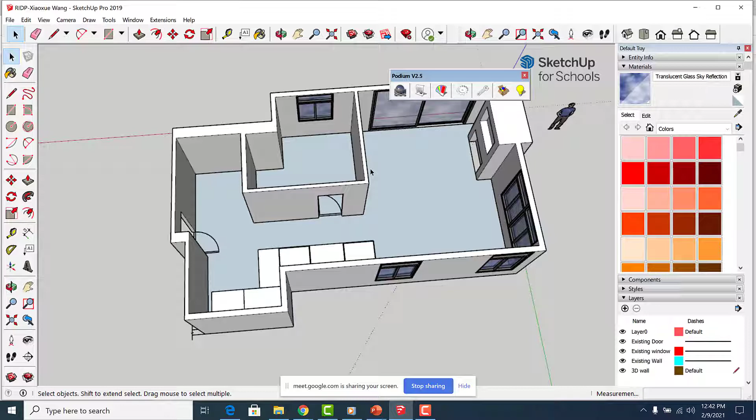If you do everything step by step the way that I asked you guys, probably you can do the baseboard really simple. I asked you guys to make a block of your walls, make a block of your floor. So what you have to do, you can copy your floor and bring it out.

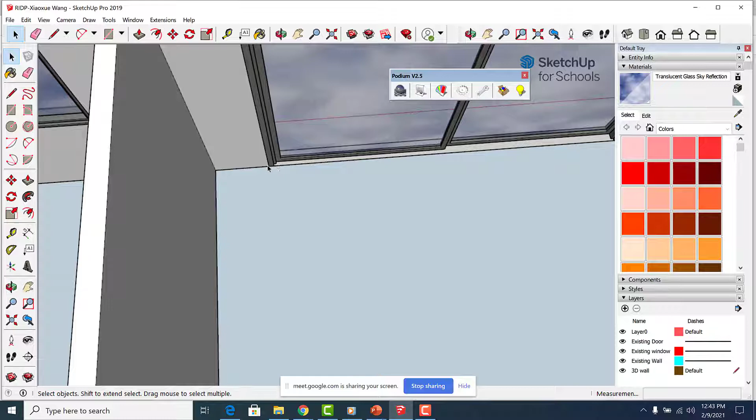Sometimes when we are making the floor, the part that's opening would already be reflected there. Last time I added a line, then I realized it's already there, so I just wanted to double check. See, it seems that the opening is there.

I don't know if you remember last time that I explained how to add the baseboard, because baseboard, we stop it where we have our opening. So the baseboard is not continuous there.

So why is it too slow? No. Nothing is happening. What happened in the morning? I know, oh...

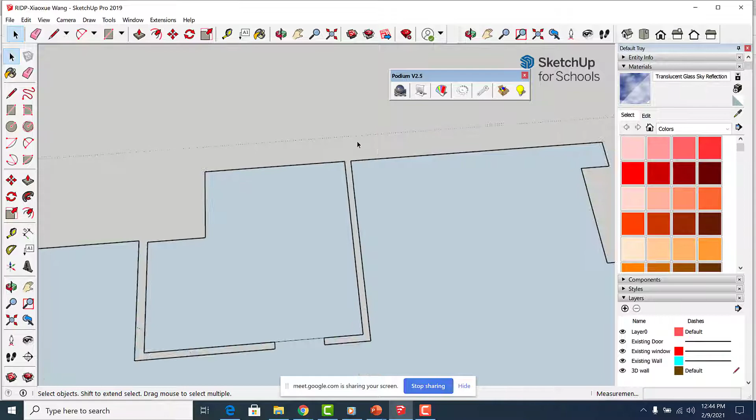Okay, here you go. Remember I asked you guys to add a line where you have your opening. In this case, it seems that I have the opening. So what I would do, let me just explode this to really see what's happening.

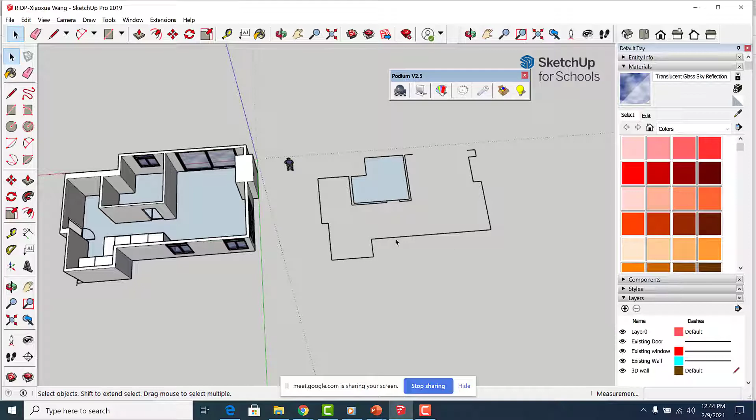See here, this is the opening there. Then we have no opening here. We have another opening there. Let me see - so basically I don't need to mark my openings.

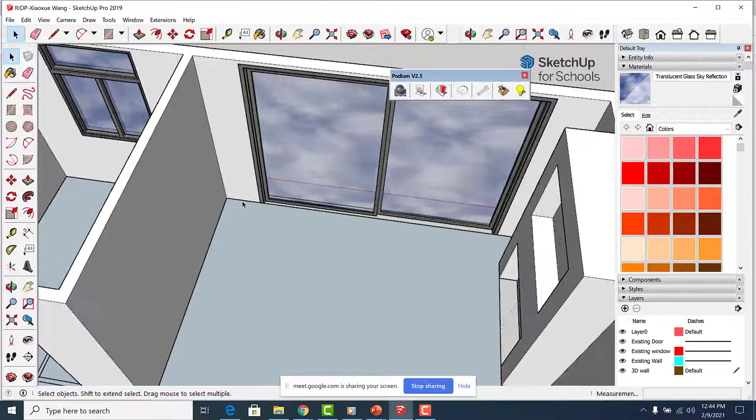The only thing is, if you already have the frame, sometimes you have a molding around. If that's the case, maybe you can mark the start of the molding, because if I have a molding here, imagine it goes all the way - my baseboard would stop here. So in that case, I would mark the opening, or I can modify it later. Either way, it would be fine.

So for now, I don't have the molding, so I would just ignore it. Imagine that we don't have any molding and I have my openings - that's perfect. In this case, the other thing you have to keep in mind really depends on your design.

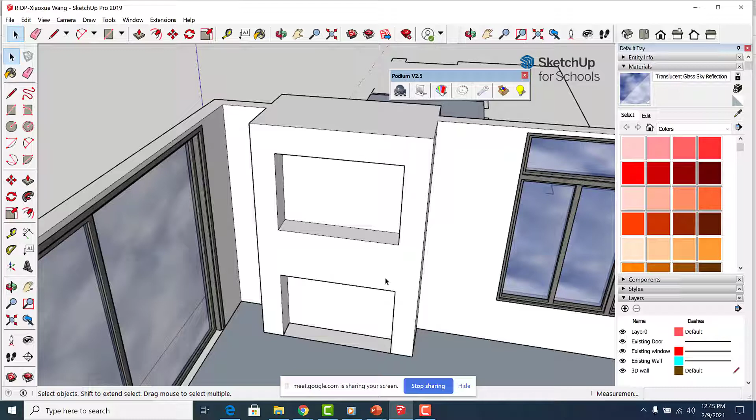Sometimes the fireplace - it's the electrical one - it's not going to the floor, and then your baseboard continues here. Sometimes it's a recessed electrical base, not electrical, it's an actual fireplace. And even sometimes you have a little bit of stone or brick that's coming like that, so then probably I don't want to continue my baseboard here.

So it really depends on your design. I cannot give you one way to do it. You have to know your design and decide how to do it.

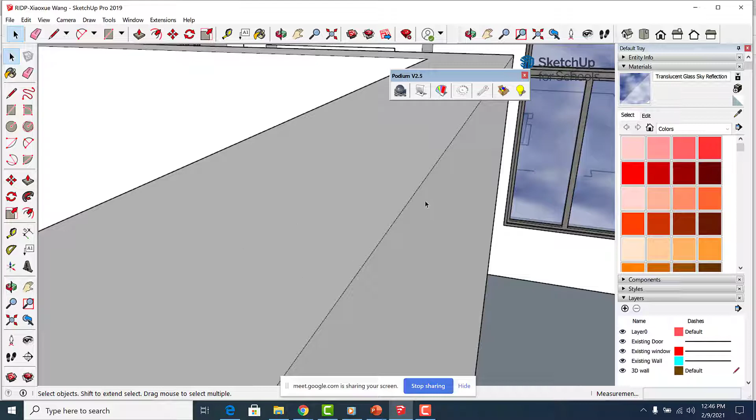Something that is bothering me is that I get stuck inside one part and have to zoom out every time. My suggestion is always at the beginning of your design, add a scene, go to the top view so you see everything, add a scene, and change the name to top view. So anytime I'm stuck again, I just click here and I'd be fine.

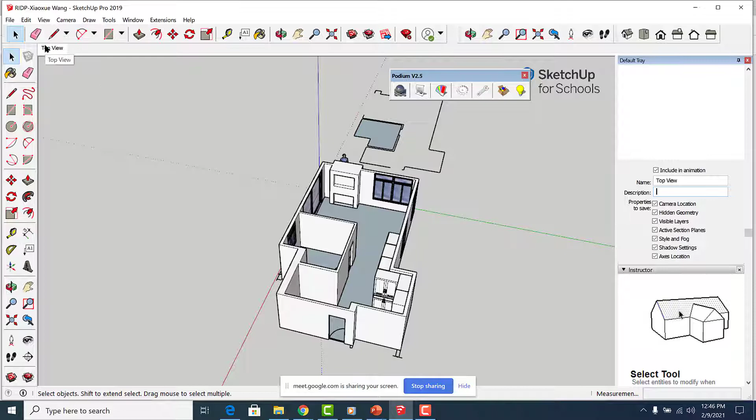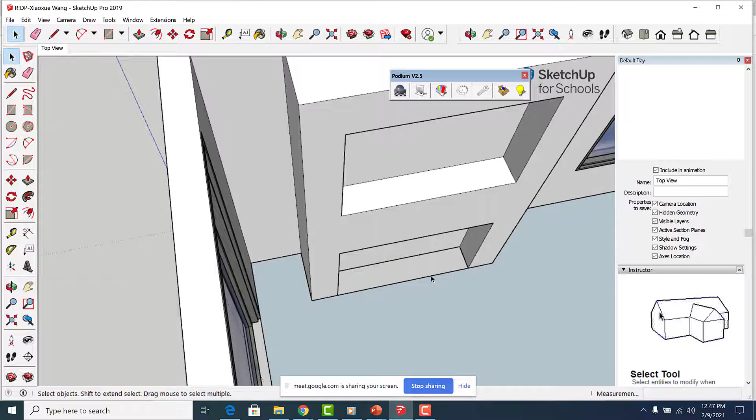In that case, I would maybe just assume that my baseboard stops here. Let me see if I have that opening too or not. Yeah, so maybe I stop my baseboard here, because for sure I don't have baseboard there. I don't have your design, so you have to decide.

For now I would put, for example, brick there and make it clear that part is brick. What's the finish of your fireplace? Could it be a stone, a marble? Stone? So it goes all the way to the floor?

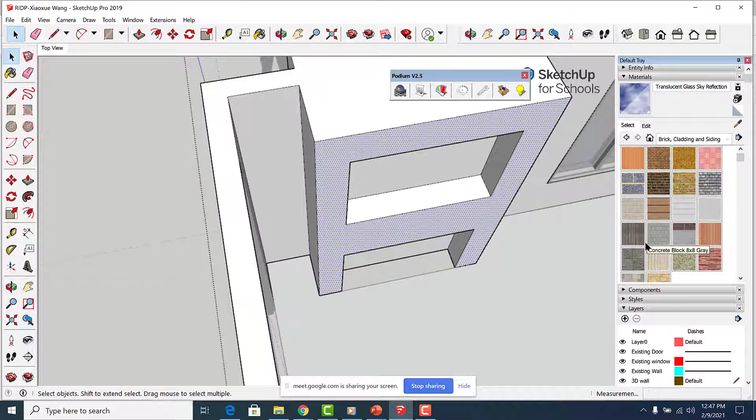No, it should be like where the partition is right now - there is like a partition. So above that, it should be stone and the rest... the rest is what? Are you sure? Up and the rest above.

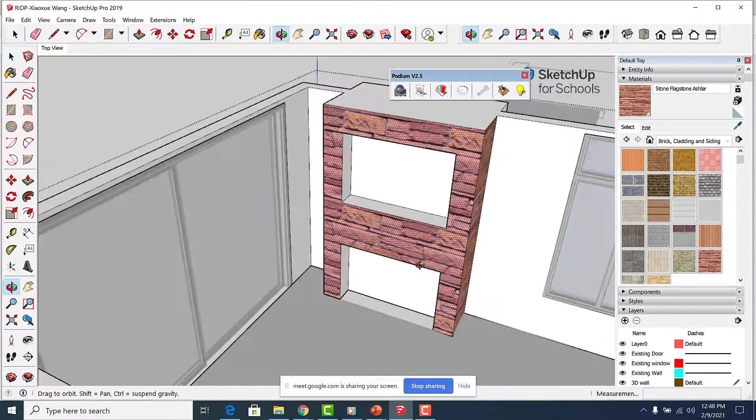Depends on what your design is. For example, in mine, from that partition up, it's like painting, and the molding is wood. The rest bottom part is stone - probably ceramic or a stone.

Yes. So in this case, as I mentioned, I would imagine that I don't need the baseboard in front of the brick. You can, but we don't need it. To remind you guys, baseboard is to help protect the bottom of your wall. I guess my mouse is dead now.

See, as I mentioned, if I record - can I ask a question? Sorry? Can I ask a question? Yes, go. Now, which one is better: to put the brick over the fireplace and then make a hole, or vice versa?

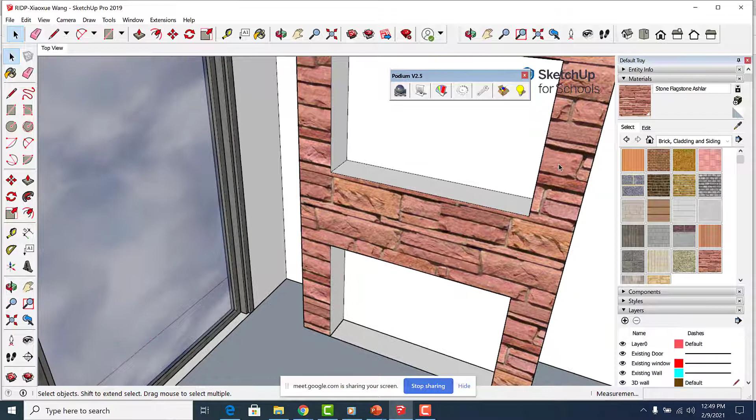Is it better to put the brick over the fireplace before you make the hole? Doesn't matter. Anywhere, you do it this way, then add the material, or it doesn't. See, if I have the brick, I can just make a hole after. It doesn't matter.

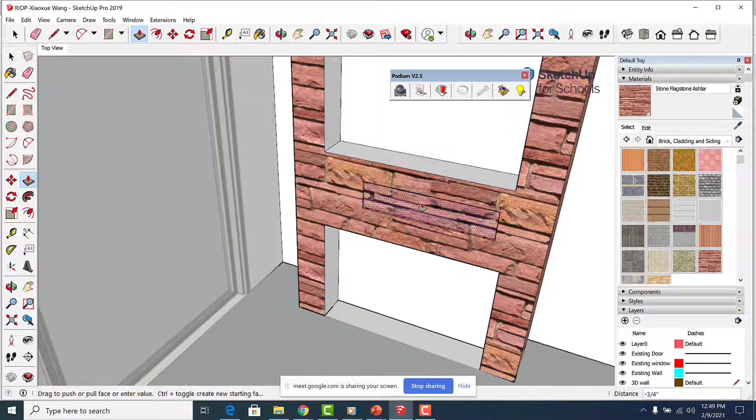The only thing is, when you have the material and then apply the hole, this material goes all the way with your hole. But if you apply the material later, you can apply it anywhere that you want. Here it's not a big deal. If you don't want that, you go change the material, or I can go change something else there.

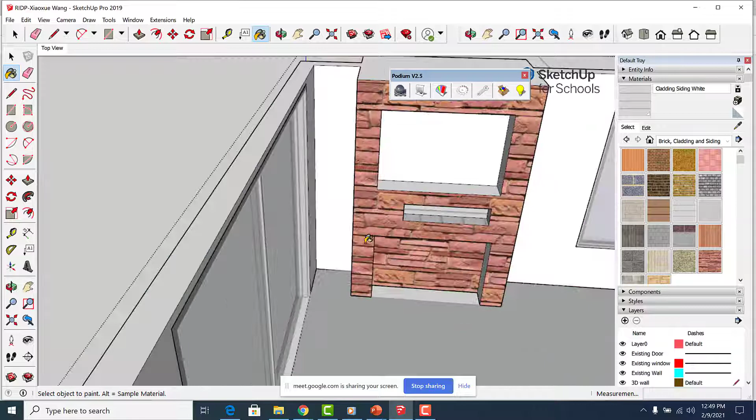Okay, so honestly it doesn't matter. It really depends how you are doing your drawing. So in this case I had the fireplace and I applied the material later. If you don't have the fireplace, you can just do it for now.

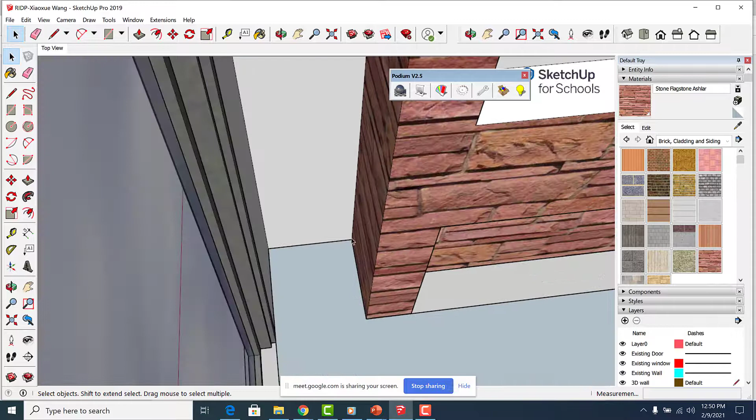Imagine this is my fireplace, and my point is I don't need baseboard here. If you want to put it, it's fine, then you have to fix it here. For example, if I want the baseboard to go all the way, I keep this line. If I don't want the baseboard there, I delete this part. This is the path for my baseboard, keep in mind.

So anywhere that I want the baseboard, I keep it. Anywhere that I don't need it, I just delete it. In this case, I delete it.

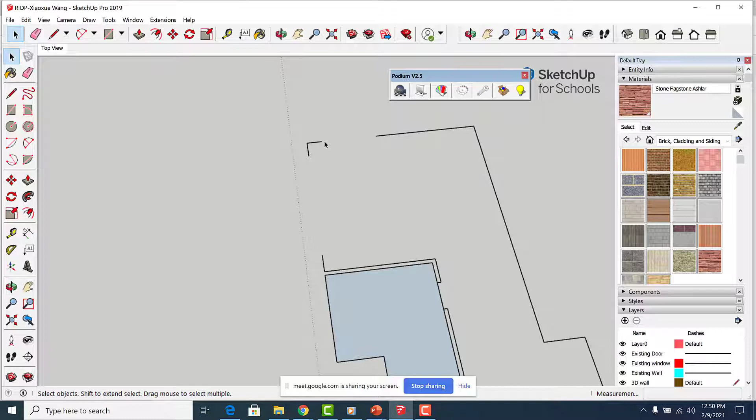So then the next thing, when I have the path, the question is: what's the profile of your baseboard? There are many different types of baseboard, really fancy, 10-inch, 8-inch with lots of detail. It could be just a 4-inch by 1/4-inch rectangle, and that's it.

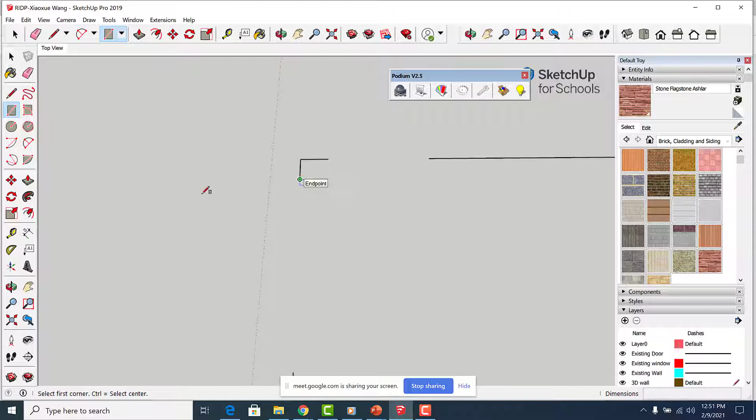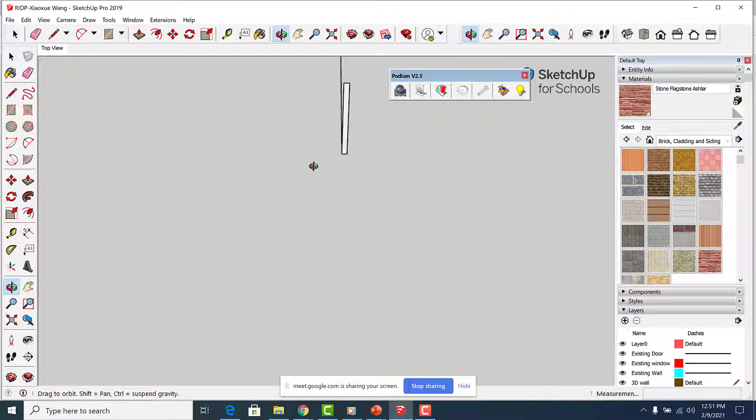That's part of your design. I cannot decide for you guys, but for now I would just draw something. I want to draw a rectangle that the red axis passes through. I right click with the right arrow, and I just draw, for example, 0.25 comma 4-inch.

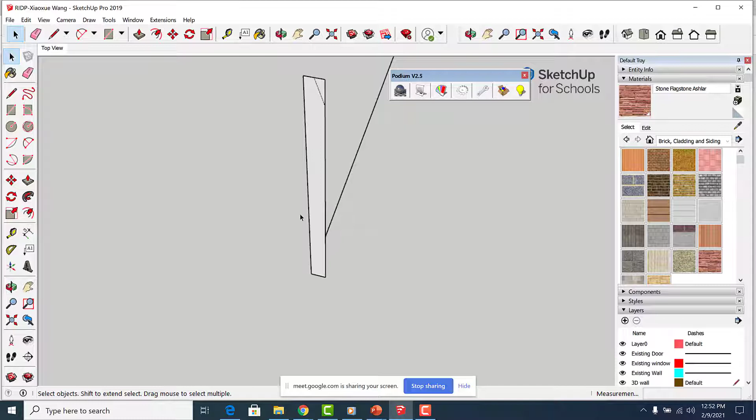It could be, if you have a really modern design, something like that. If you want to add detail, be my guest. Even you can go in the 3D Warehouse and click search for molding baseboard, you'll see tons of them. You can import it into SketchUp, copy the one that you like, bring it here and use it as your profile.

For now I would just do something to show you guys how you can do it. Imagine, again, I would do it kind of modern looking. So it could be something like that. It's simple and clean.

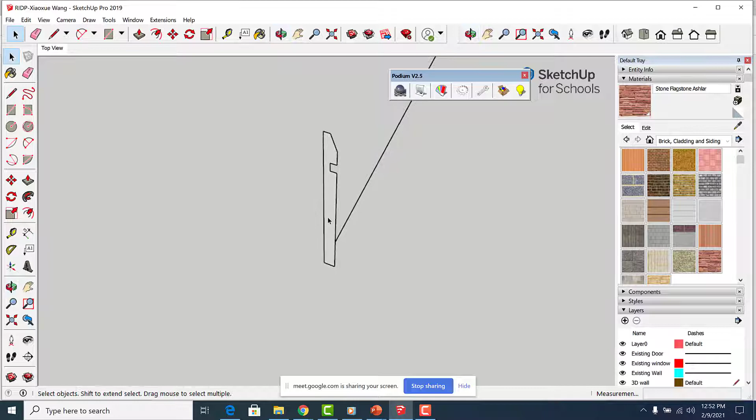When I have the path, what I would do is make a copy. I select and I Control C because I need it again. If you're not sure if you can keep it, just make a copy, place it somewhere. It's not a big deal. Anytime you can come and select this one.

Now I have the path, I have the profile. What I would do is double click. In this case, it's two lines, I can select it like that. But when I have a path like that, the easiest way is triple click.

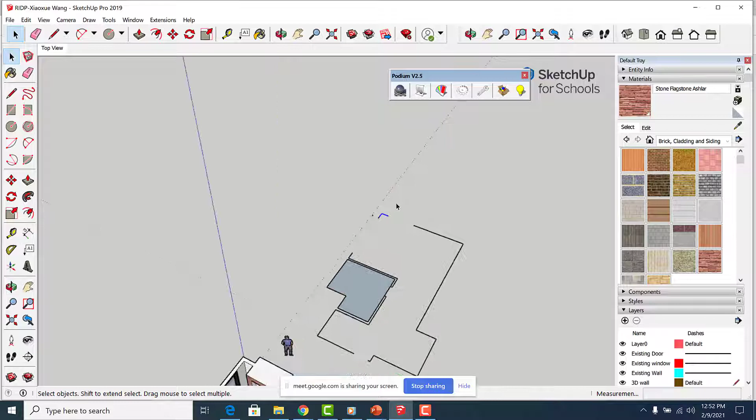If I triple click here, everything that is connected with that would get selected. Is this my path? No. So what I have to do is remove this from my selection. How can I remove anything from the selection? You press shift and open a window like that.

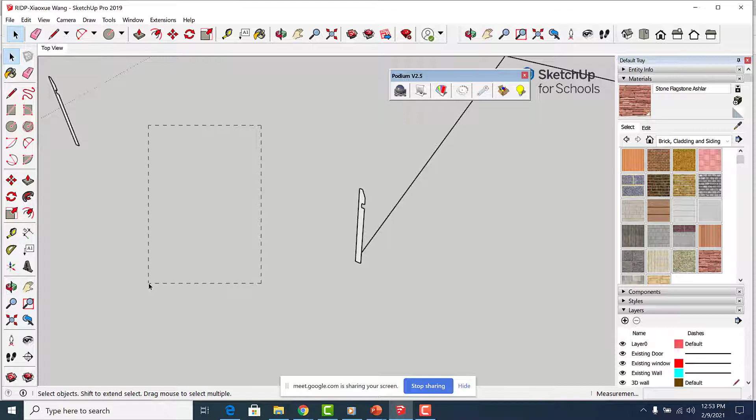If you open a crossing, it would remove that line too. Remember, this type of selection selects everything that is completely inside it. This one, crossing, when you see the dotted line, means anything partially in it would be selected. If I triple click to select this one and press shift and do this one, now this line is not part of my selection anymore.

I hope you guys remember those exercises that we did for selection. In this case, I triple click to select them, press shift, and remove this. This is my path, this is my section.

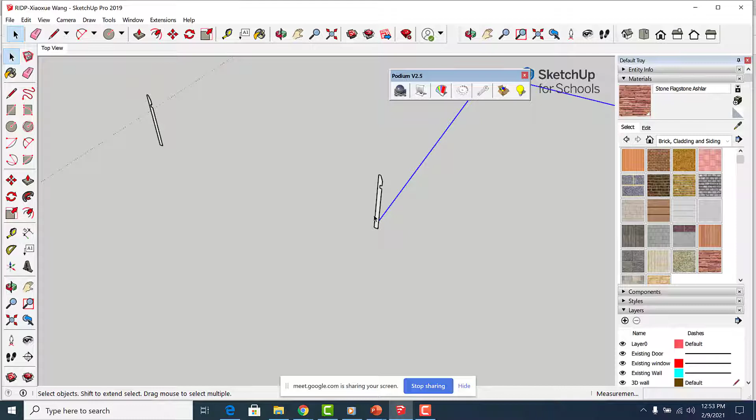This is my profile. I go to the Follow Me tool and tell SketchUp to just use the path and draw this. When I'm done, please guys get into this habit: this is one piece, I would make a group. If you don't make a group, you would forget it and it would cause you problems later. So, triple click, make a group.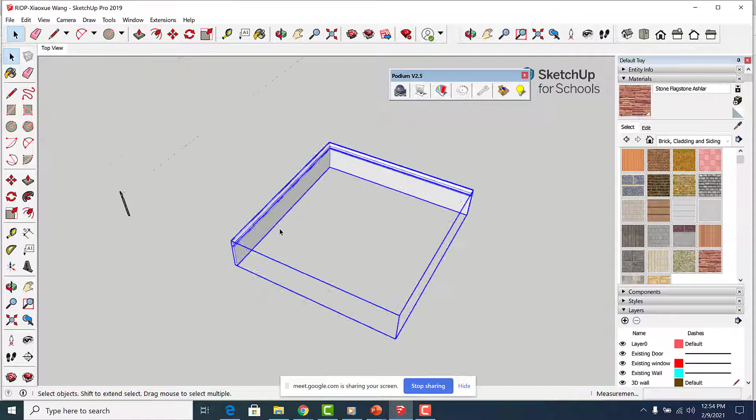If you know the material, apply it right now. If you don't know the material, leave it for later. So the thing is, if you're not sure about the material, it's better to apply it later, because when there's no original material applied, you can apply it outside of the group.

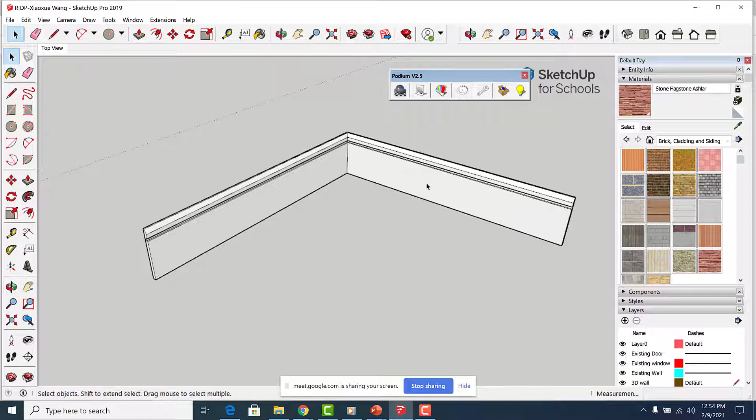But sometimes if you apply the material, the next time you want to apply another material, you have to go inside the group. So it's up to you, but for now I would leave it like that.

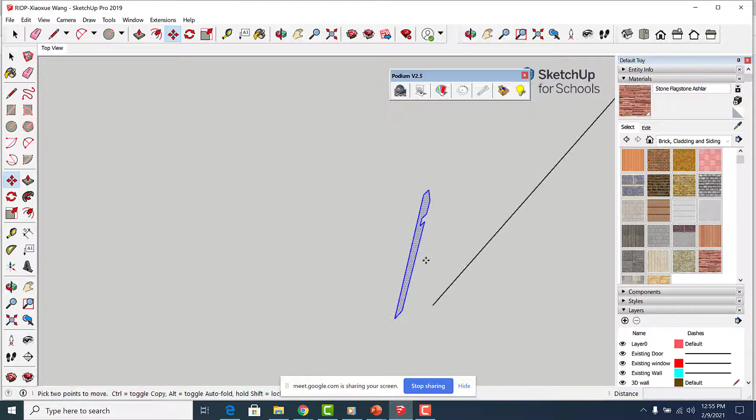Now I go to add the baseboard here. So what I would do is use Control V. Remember, I saved this one and I place it here for now. As you can see, it's in the wrong direction, so I have to rotate it. Around which axis should I rotate this?

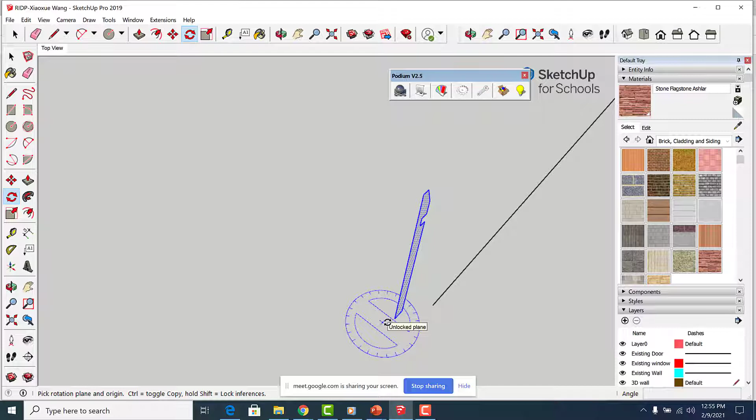Green one? Are you sure? Red. No. Like that. See, it's blue. Yeah, green, red. It's not. Then it's blue. But it's gonna be trespassing. The green axis is gonna trespass. See, I want to rotate this like that.

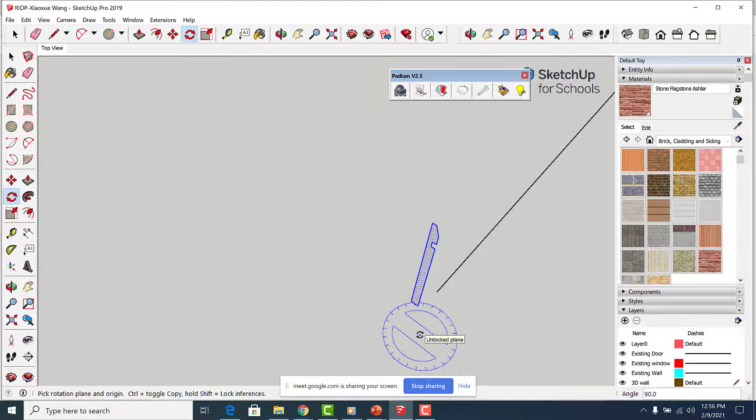It's around the blue axis. That's why when the circle is blue, I place it there. Then make sure you go to the green direction, for example. When you see the red direction, you click. But Kirash, it is like this. This is the green and this is the red. The blue is going up. It's already up, right? Yeah, but okay,

rotation works with the axis that is passing through it. See the blue axis passing through this, that's why the circle is blue. So I'm rotating this around the blue axis. I know that you said it's not clear for you. So what I would do, I would remove this one and put it where I have my blue axis.

Okay, so now tell me, around which axis am I rotating this? Blue. Yeah, so see when I go to rotate, the symbol for rotation is blue and I rotate it around blue. When I'm rotating around blue, it goes this way. If I rotate it around the green axis, it would go like that. See, it's rotating around the green axis because the green axis is passing through it. Okay?

So here you go. I rotate it in the right direction. I just select it from this corner and I place it there. Now I have the path, I have the profile, I triple click. See, when I triple click, everything is selected. But this is not part of my path. I press Shift and I remove this from my selection.